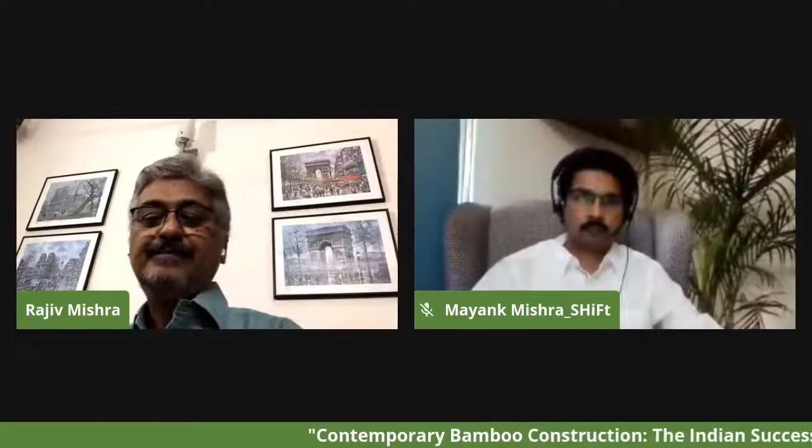Being an alumnus of the prestigious Sir J.J. College of Architecture, Mayank naturally adopted the role of principal architect with Shift, a boutique collaborative practice working mainly in the field of sustainable architecture. Being able to simultaneously lead the various processes at Shift, Mayank works with creative research and analytical thinking. He exhibits leadership as well as managerial skills while maintaining the core role as a doer. Known to be creative, naturally, since he is our student, he also exhibits great understanding and brings a high degree of concentration to his work. Sustainable campus design, green office buildings, master planning, and eco resorts are some of the well known real estate projects he has already worked on.

Water management systems, energy cycle, and life cycle are examples of Mayank's specialization. This will be followed by a talk from Dr. Abhay Gupta, a civil engineer since 1981, who did his ME in structures from SGSITS Indore, and PhD from University of Roorkee in 1996. His specialization area was aerodynamic interference in tall rectangular buildings and wind tunnel studies.

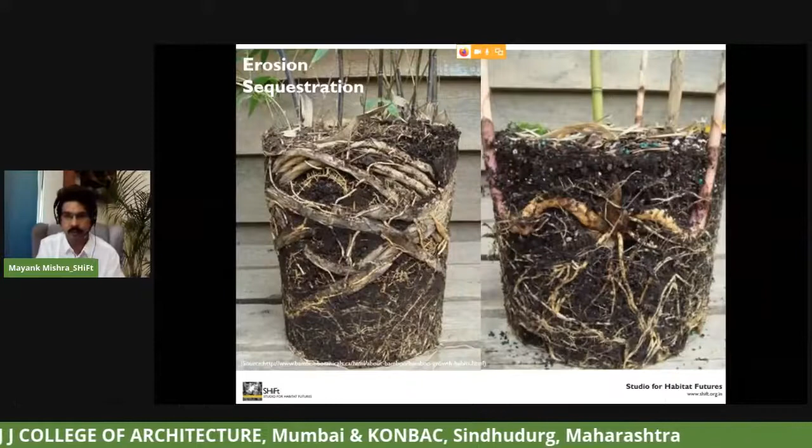But of course, it's a rapidly renewable grass. It grows in 3 to 4 years, ready to be used. It reduces soil erosion dramatically. It sequesters carbon dioxide, which means this is the only material that instead of producing carbon dioxide, it actually sequesters it. So if you're using bamboo, it will reduce your carbon footprint rather than add it to the environment. All of us know bamboo has been used as an element, as a member, in various handicrafts and other things.

But can bamboo be used as a structural element? Traditionally, yes, bamboo was used as a construction material. Most of our rural houses used to be made of bamboo, but it doesn't inspire most architects to use it as a modern material. It has been considered a poor man's timber, but now in today's world, it has taken over wood and can be considered a substitute for wood altogether.

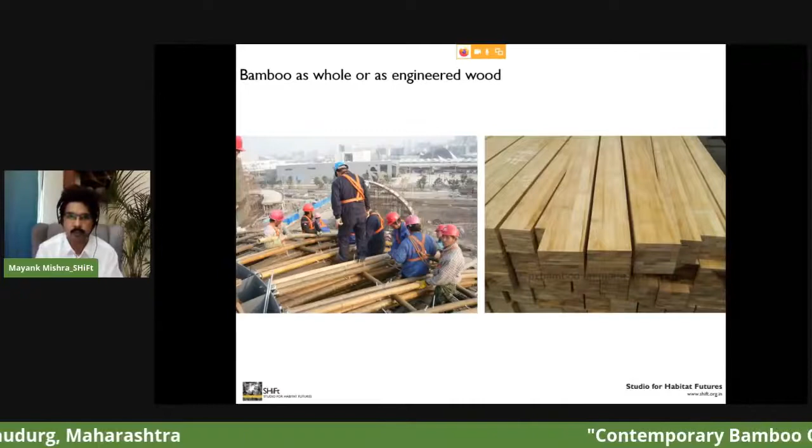Bamboo can be used as a whole element, or as engineered wood. There are various forms of bamboo that can be used. It can be used as board, in interiors, in structural members, for cladding and various other ways. So yes, bamboo can be used in construction technology in today's world.

Can bamboo be used in modern architectural practice? Can it be shaped like steel? We are very much aware of steel structures and the way they've been shaped today. All of us love it. As an architect, it really excites us a lot.

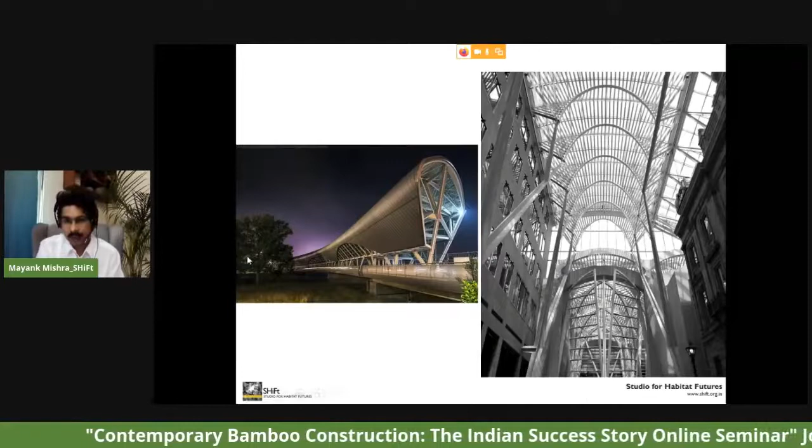But we need to understand that all of these structures are resource efficient structures, which means that steel, when designed, has been taken care that it behaves the way steel is supposed to behave. Similarly, concrete is designed in a way where it's supposed to behave. So can bamboo do the same thing?

Structurally, yes, because if you see the tensile strength of bamboo when you compare it per unit weight to steel, it is higher in tensile strength as compared to steel. The bamboo has a higher tensile strength.

It does have various other issues related to its compressive strength and other things, but that can be taken care of if we are able to design the structure in that way. This really opens up a new ambit of practice for structural consultants also, which means we need to design buildings in a different way. We need to get new codes in place. We need new methods to design these structures. And yes, it can take various shapes. Depending on the diameter of bamboo that we use, we can allow various kinds of shapes with the same material.

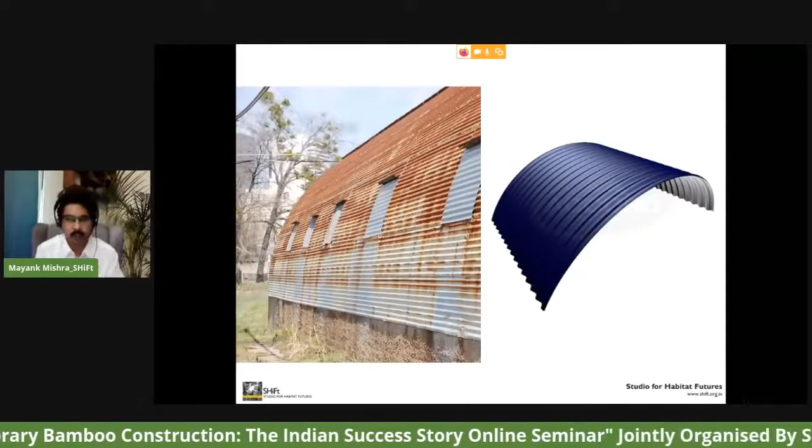Can we rely on bamboo like other industrial materials? Most of our industrial materials have their advantages and disadvantages. We have gone through it, we have prepared various kinds of solutions for it. Like for steel, we have various kinds of coatings that can take care of it. So we know the pros and cons of that material. Similarly, for bamboo, we do know that there are borers and termites that can create an issue for bamboo.

The weathering can be one of the issues, but all of these can be taken care of by having various kinds of treatments, having design which can make sure that it is not directly exposed to those kind of weather conditions. So yes, bamboo can be used as a material in today's world.

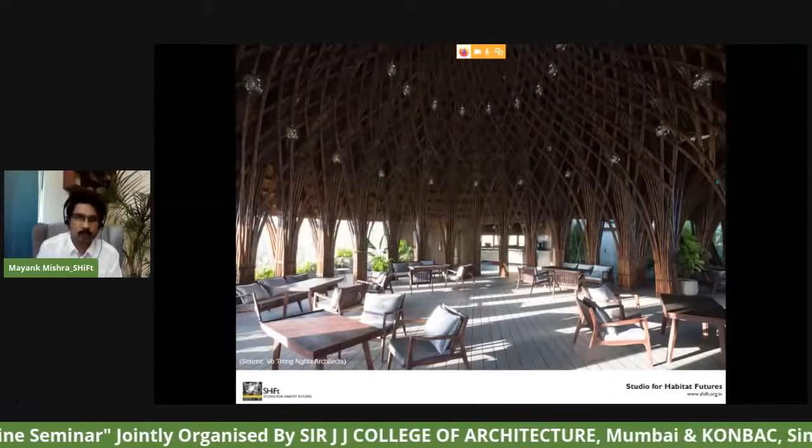What are the global examples that we have? Famous architect Vo Trong Nghia from Vietnam uses bamboo very often, and the structures really look very great. You see the diameter of bamboo and the kind of design that you see over here. Similarly, Simon Velez, who's also one of the inspiring architects, also uses bamboo. The difference that you see in both of these structures is actually the difference of the diameter of bamboo, which defines the way the structure has been designed.

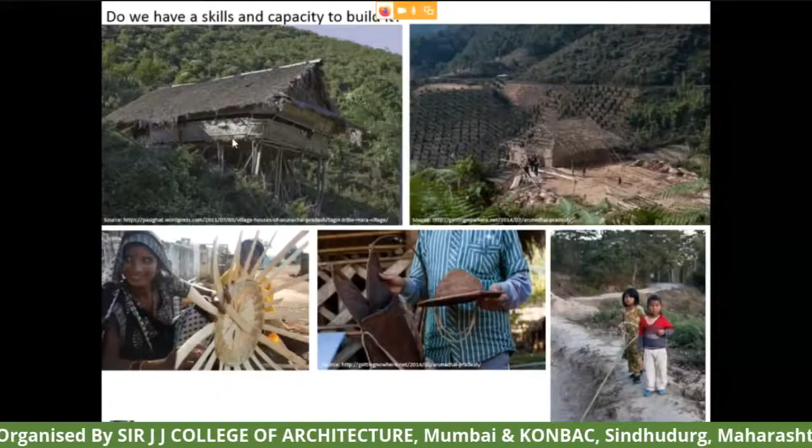The first question that comes up is, do we have skills? Do we have capacity to build something in bamboo? The leftmost picture on the top left hand corner that you see is of a hut being made completely in bamboo. This is a rural house in Arunachal Pradesh. It is on a cliff at the edge of a hill, almost hanging like falling waters, with a natural material. On the right hand side, you see a house being made in bamboo. So yes, certainly we have skills to build in bamboo.

Now, it's not only skills that we have to build in bamboo, we also have craftsmanship that can be used with the material like bamboo. So culturally, we had these skills. We were able to use these materials as building material and also as crafts.

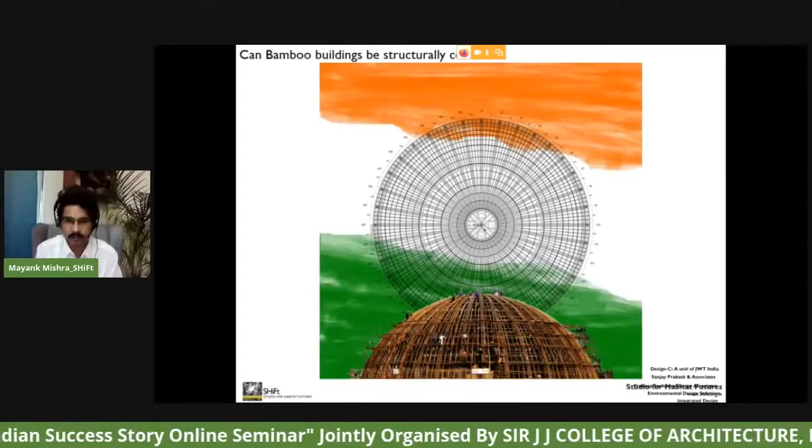So this is possible to do. It is possible to use structures, structural elements that can be certified by structural consultants. Of course, there is lots of work that has to be done in codes, but certainly in today's world, we can start working with structural engineers who can certify these buildings for certain kind of things.

This is a picture at the day of inauguration. You can see lots of people lined up wanting to enter this project. So I think we got the maximum footfall on day one to see the bamboo dome.

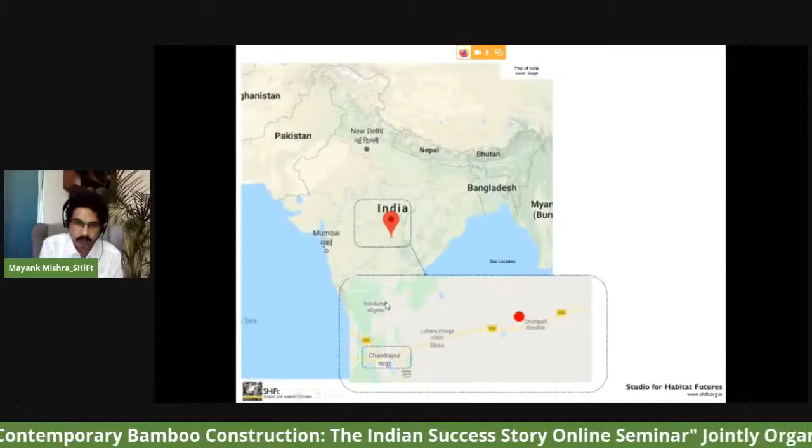Now coming to the story of BRTC. Having the experience of all of this, having global exposure, there was an initiative of the Government of Maharashtra and Tata Trust, something about which our earlier panelists have already spoken. The main concern was to create a project in Chichpalli, very close to Chandrapur, and as correctly said by Mr. Ramarao sir, it has lots of bamboo going over there. It also has Tadoba National Park, which has lots of tigers in those areas.

One of the stakeholders of this project are the tribals of this area, whose main livelihood depends on forest and the buffer zone of forest, where they actually collect biomass and sell it outside, which does create a conflict with the wildlife. If they are entering into the wildlife areas to collect this biomass, that would create a conflict for the wildlife and for the humans. On the other hand, this is not a fixed source of income, which is not a reliable livelihood opportunity. And as tribals who always had entrepreneurial skills, this is not something that we would want them to do.

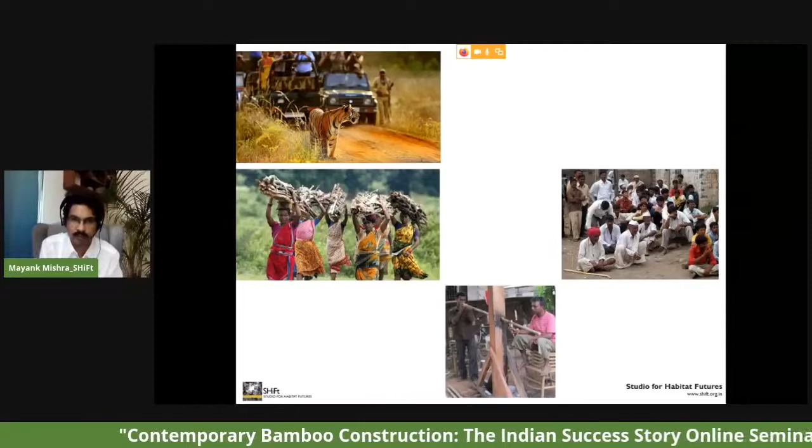India has a huge population aged between 25 to 50, which wants to have various kinds of skills to earn their livelihoods, to have employment in various sectors. And of course, there is a possibility of bamboo being introduced in this area where the skills can be developed. There are lots of farmers who are in distress today because of the crops, because of the rains. Sometimes they have no rain, sometimes they have too much rain. All of this creates an issue for a farmer. So growing bamboo can also help them because it's a sturdy crop.

It can actually withstand these weather conditions, and would assist farmers to have an additional source of income. Bamboo can be linked to them, and products made from these elements can be sold in the market easily. All of this, when sold in an urban scenario, the money generated goes directly into the hands of the people who need this kind of livelihood, which ends up promoting bamboo as a sustainable material, promoting bamboo farming, and also reduces wildlife conflict.

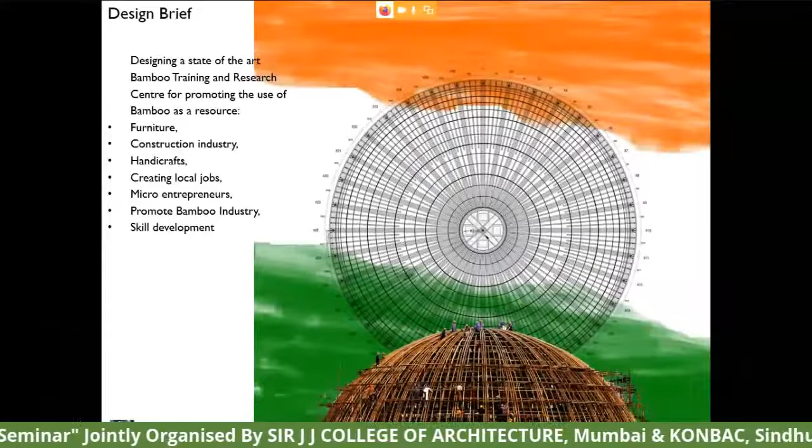So the design brief we had was to create a state-of-the-art center which would promote various technologies, where people would be able to do research and make various kinds of furniture, work in the construction industry, and handicrafts. This would help create local jobs, make many micro entrepreneurs, and promote bamboo industries.

These were the various courses that would be offered in this institute, including courses for awareness and Skill India, meaning engineers and architects need to come to this institute, work with these artisans, and create various designs, whether furniture or building industry. This institute will provide a platform for architects, engineers, and artisans to work together to create something in bamboo.

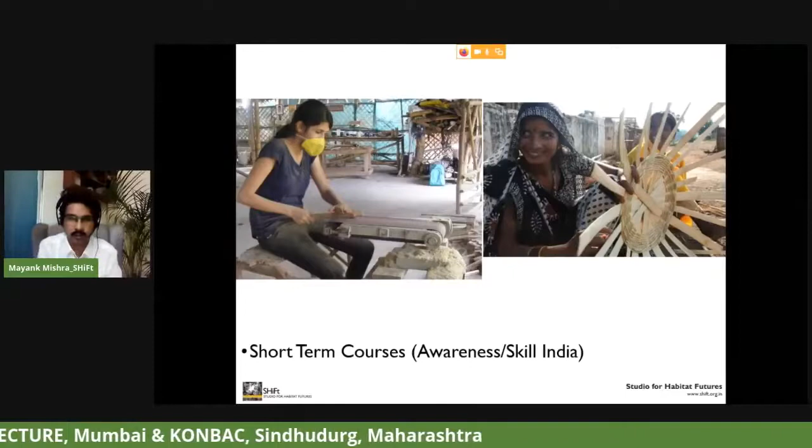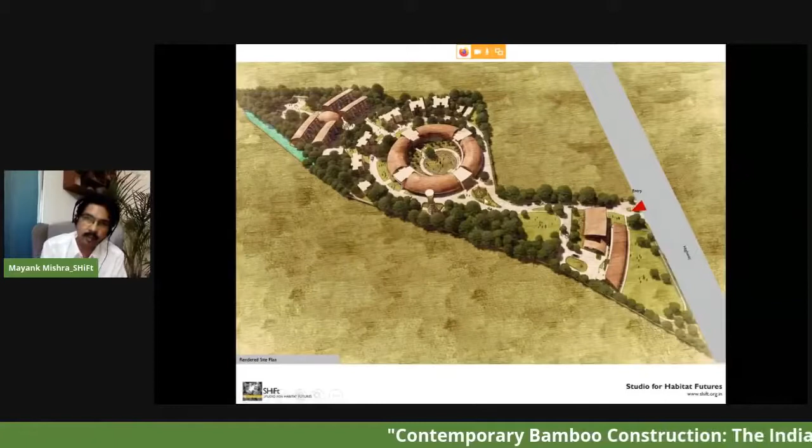This is the administration block. Lots of people would visit this area, see the products being made, which would get exhibited in this exhibition zone. The central block is the academic and workshop area. Behind that is the residential area, then the hostel blocks, and then the STP and other parts. I'll quickly go through these slides.

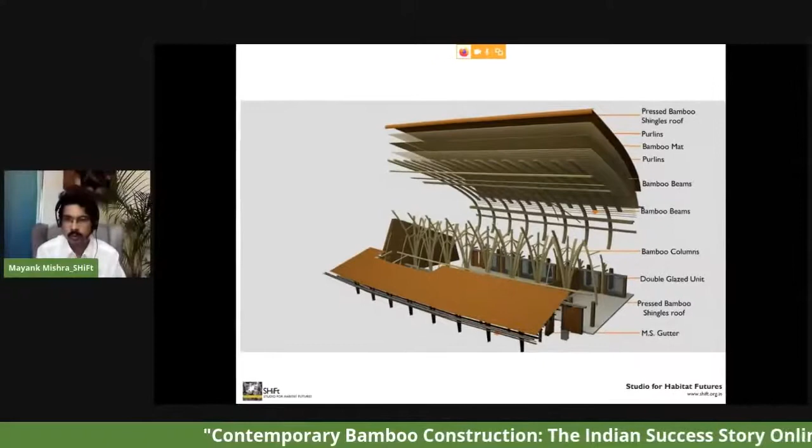The idea was that after ground level, we should use bamboo as the structural element, so bamboo was used in every form—columns, beams, purlins, bamboo mat, and so on. For infill, instead of using bamboo, we felt we could use another material, rammed earth, which helps reduce the temperature difference from outside to inside and also gives a very good look to the whole project. So the other material added was rammed earth walls.

A business-as-usual approach—what would have happened if we'd gone with that? It would mean architects and engineers design something that goes for a mock-up, where the technologists and craftsmen—construction managers, PMCs, bamboo and rammed earth experts, and craftsmen executing it—make a mock-up and give their inputs. It would get redesigned, with architects defining what needs to be done, taking the front seat while everyone else takes the back seat, and then everything gets executed.

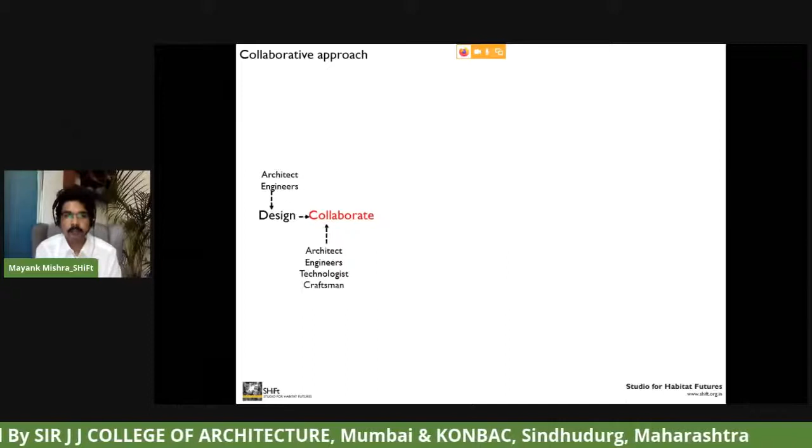But here, it would not have been successful without a collaborative approach, meaning the design would be developed and then collaborated on with all of them. The designs made were sent to all these people and discussed well in advance before releasing those drawings for mock-up. Then the mock-ups were created.

Again, after the mockups, there was a collaborative effort to see how the members and elements are behaving. We would go back to the design board, redesign it, finish the whole process and send it to the technologists, craftsmen, and everyone else in the team. Only after that would it go for execution.

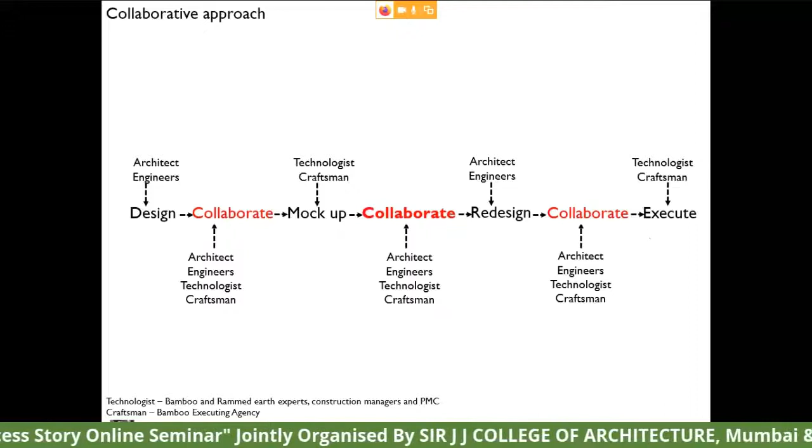This does mean that initial time was taken up for collaborative effort, but at the end of the whole process it really saved a lot of time for all of us because we didn't have to re-innovate everything. So a collaborative approach really helped us a lot, and in all of these approaches we got huge support from the government of Maharashtra, all their departments, and particularly the clients, who always supported us and allowed us to do various kinds of changes which was not easily acceptable in a business-as-usual approach.

We would end up saying, this beam has a problem, we need to change it, and that would be just after the mock-up. We would change it, redesign it, reissue the drawings, and redo it. So this was something required for a project of this type.

We got huge support from Studio Auroville, who helped us create these rammed walls and helped us do the transfer of technology over there. So now we have people in Chandrapur who can build rammed walls.

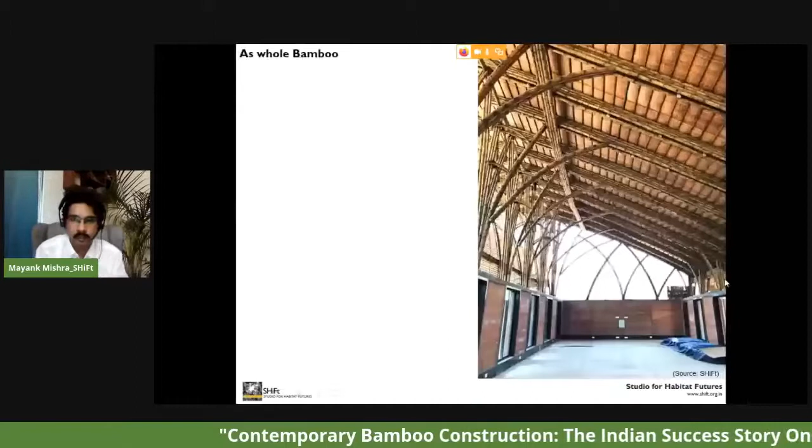There were various other things done. The configuration of the buildings was done such that the first project, the experimental block, used bamboo as a whole. All elements were assembled on site and then executed on site. This was the first one where the bamboo used was of 100 dia, and you see the difference in how the spans are taken care of.

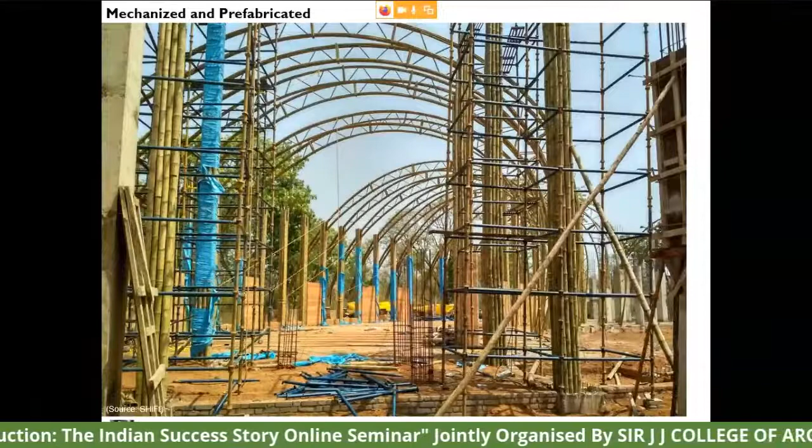The other approach we took was to mechanize and prefabricate most of these elements. All of these elements you see were prefabricated in a factory and then brought to site and assembled — the columns were assembled, the trusses on top were assembled. All of these were prefabricated. It reduced time consumption on site, helped us manage quality, and gave confidence on site for the people getting it executed.

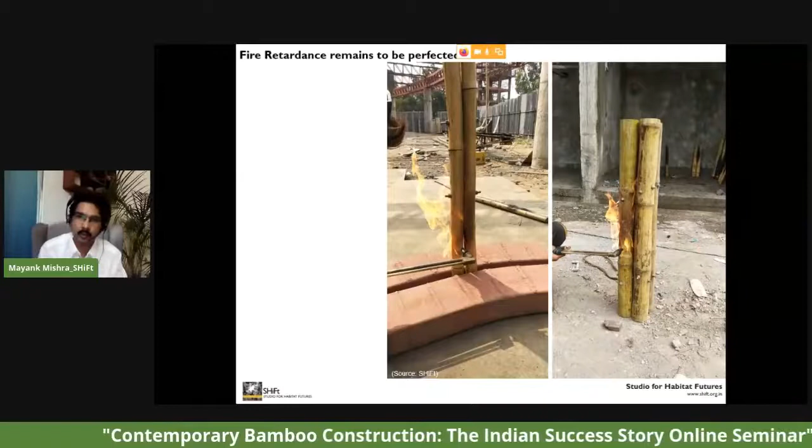What are the areas of research now when it comes to bamboo? Fire retardance remains a concern. We designed these buildings so people can evacuate the structures in 45 minutes. There are a few areas where RCC staircases were added so evacuation becomes easy, and it also takes care of the national building code.

There are various coatings available, used in wood structures, that can be applied to bamboo. This is an area we are working on, and I think we have been able to successfully demonstrate an increase in fire retardance of this element to 2 hours. Naturally, bamboo has fire retardant properties because of its outer shell, which retards a lot of fire. After that, if fire goes inside, that is where collapse starts happening.

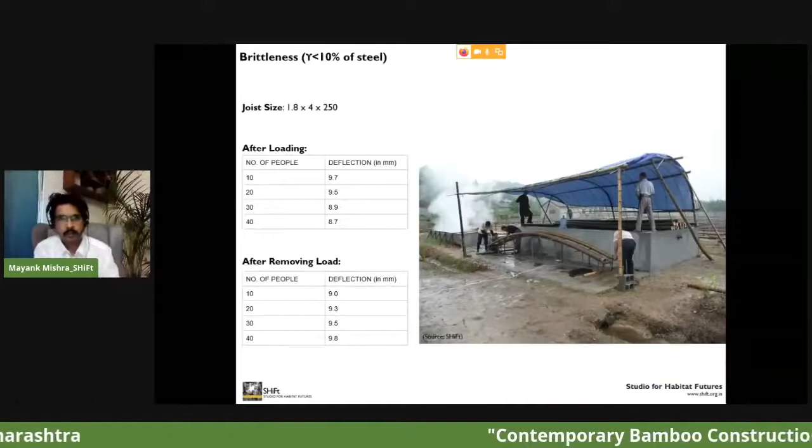You need codifications for the control of cracks, since bamboo is a linear fiber material that grows naturally in a linear way. There is a brittleness in this element, meaning there would be some deflection after the building is designed, so you need to design for that deflection. There is also variability in the material — various diameters — which is not easily accepted by structural consultants. They would say, please define 50 or 75, while you would end up getting 60 or 85 kind of dia, and the dia would also vary at the start and end of the material. So this variability of natural material needs to be taken care of.

There is a huge research area in joints that can be taken up, which can be the next area where the codes and all of these things can start defining it.

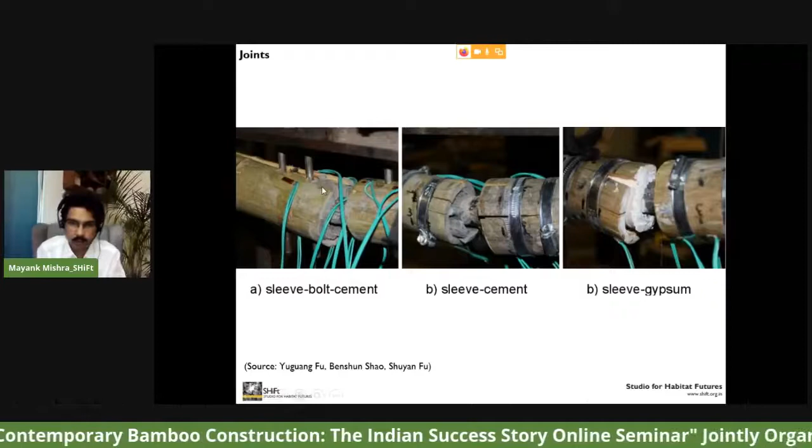This photograph that you see over here is actually a load testing for deflection at a lower level, where our structural consultants and our proof consultant are standing and checking what kind of deflection you're getting with this bamboo beam. And you see all of them collaborating together.

So you have our site person from KONBAC standing there trying to see what is happening. You have the structural consultant, people from PWD checking what is happening, and Dr. Abhay Gupta checking if the beam is behaving in the same manner or not. So it's a collaborative effort, and that is something which would be very much important.

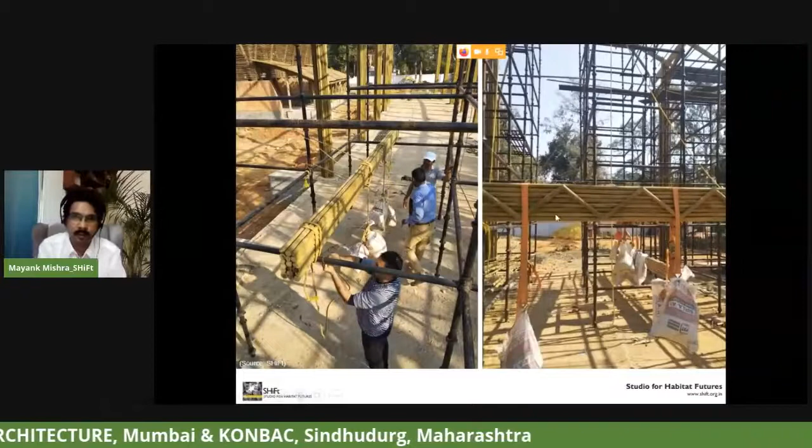These are some more tests which were done before hanging these beams and checking the deflections. There were some additions to these structural elements on site before they were added to the whole member. Of course, we also did lots of tests on our own in the factory itself to check various kinds of deflections that can be seen.

I will quickly jump to the site pictures now. These are some of the pictures. This building that you see was done in 100 dia bamboo.

After that, we recognized that we should promote the bamboo of Maharashtra, and after that we have used all bamboo being grown in Maharashtra. Particularly, we couldn't use bamboo grown in Chandrapur because it was not of that category that could be used for structural elements right away. There are lots of variations in nodes and differences in those things, but we feel in future that could easily be taken care of if we start promoting the growth of bamboo in a particular way. After this building, all the buildings were made in 50 dia bamboo sourced from Maharashtra itself.

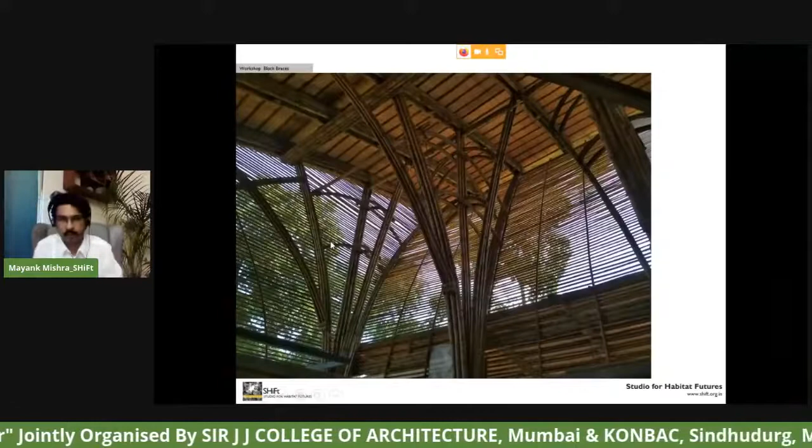This was the first building in 100 dia bamboo. There you see various kinds of shapes and forms being taken. All of these elements are structural elements, and all of these were done with structural consultants and various other participants like our site people and all of them, including KONBAC, including inputs from the PWD department or forest departments.

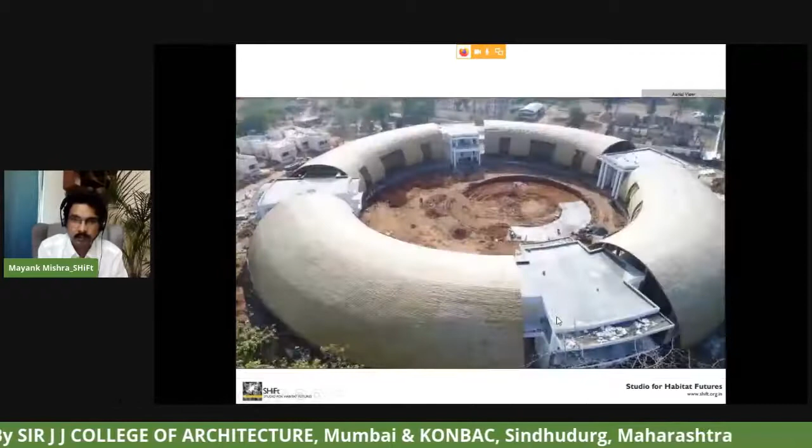Some more pictures. These are large spans, about 15 meters in one direction. Some more pictures.

In this project, we have used approximately 43,000 running meters of bamboo, which would have benefited about 54 acres of bamboo farming, which does mean that there is a positive footprint that this project has given. It does mean that there's a lot of carbon being sequestered by using bamboo instead of concrete. It has generated about 420,000 man days in bamboo construction itself. It means that you are giving jobs to green technologies, and that is a way forward for all of us to look at. Thank you.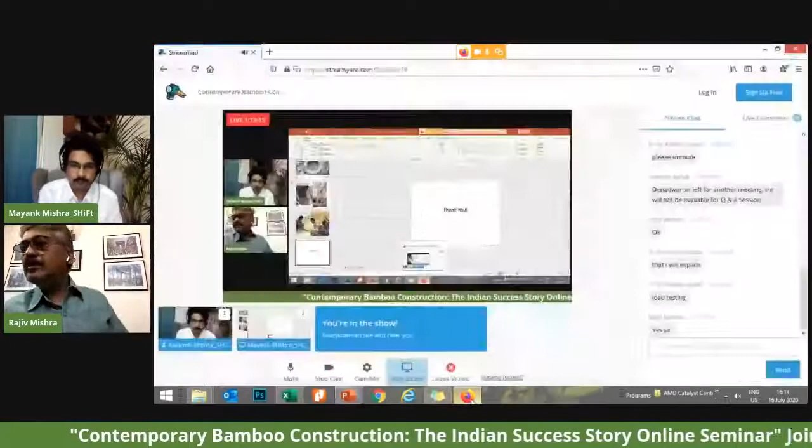Thank you, Mayank. I think that was a wonderful presentation. Totally mind blowing. It was so engaging, and every detail after detail that you were presenting.

I think with your explanation, we understood how the form using bamboo is affected, the shape of the structure is affected, and therefore now I think it would be very interesting to listen to our engineer, Sri Gupta, who actually was working with you and helped you decide the final form that the structure took because of the bamboo, the large spans that you could modify based on the behavior of bamboo as a structural material. This would basically now be understood by our structural engineer who was involved in this project. Dr. Gupta, as you know, is from Roorkee and also an academician for 23 years. And therefore, I'm sure he will put it the right way.

But many of the questions that we had to answer were how will you take care of the fear factor in bamboo? How would you take care of the structural strength of bamboo when the weather changes? And how will bamboo then be a safe material to work with? So I invite Dr. Abhay Gupta, please, to reinforce the presentation of Studio for Habitat Futures presented by Mayank, with your small talk on structural analysis of the design presented by him. Welcome, Dr. Gupta.

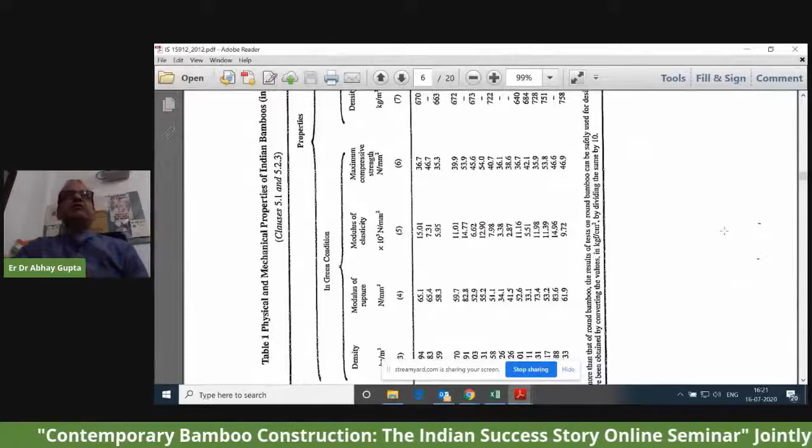The main challenge was what is available in the country, which variety and which is going to be used. So initial inputs from Studio Shift were that we are going to use 100 dia bamboo of a particular variety, Balcooa. We looked for the variety, the properties of that bamboo, and when we say bamboo, certainly the thing that comes to mind is it's a round hollow pipe, a round hollow tube. Even the code IS 15912 very clearly mentions that we have to consider them to be hollow steel tubes only. So that was one guideline for us.

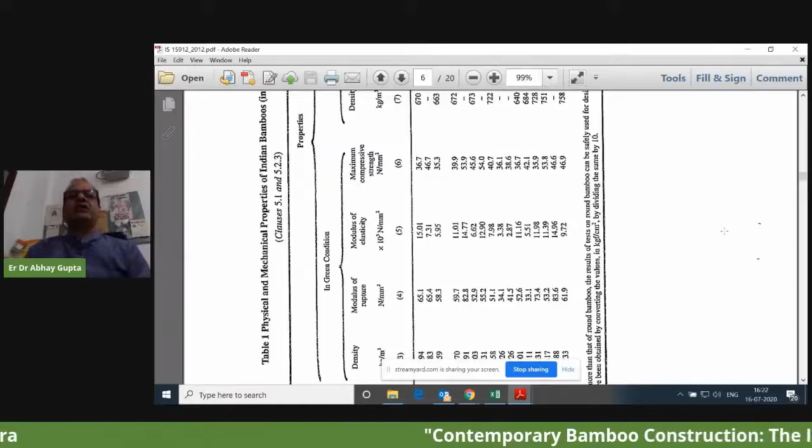Then the next challenge was how many of such tubes to be combined together to form a particular component. The main contribution that our team did was to devise various configurations as suggested by Studio Shift in columns, in beams, in various flaring elements - how many bamboos we need to give a particular shape and size. For each combination, we worked out the geometric properties. Suppose in a particular element we need some 20 bamboos of 100 dia - then how are those 20 placed? Are they arranged in a rectangle or some plus shape or what? So for each of these shapes, we prepared a table of their modulus, moment of inertia, section modulus, and their effective area. Then we modeled the entire structure in a standard software.

We all know, all structural engineers know STAAD software. In STAAD, we considered the elements to be steel tubes, but rather than the properties of steel, we used user-defined properties. There we gave the input of the bamboo properties from this code, where it is clearly indicated what the permissible stresses to be used are, along with the factor of safety.

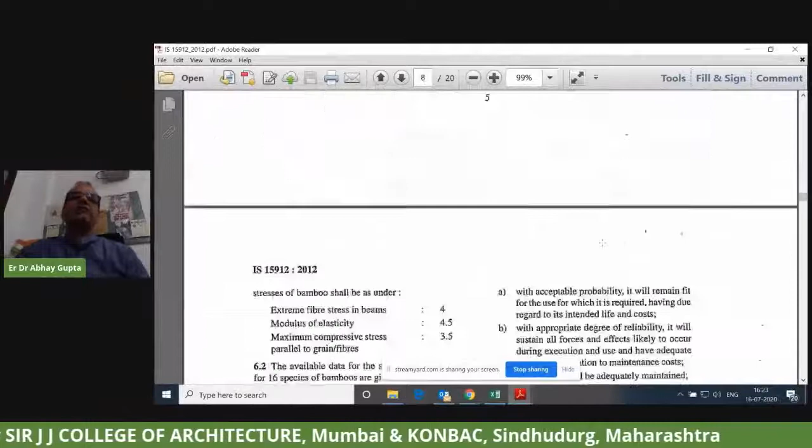This is one very important aspect for designing structures with bamboo: the factor of safety values recommended are like 4, 4.5, 3.5, meaning a very high value of factor of safety is recommended. Now there are reasons for that. Why such a high factor of safety?

Mayank has already explained that we need to understand the bamboo which is grown. It is a natural material, not a factory made product, but even then we are using the prefabricated or pre-assembled technology. The variation in properties and characteristics of the bamboo, like the diameter, varies. When I say 100 bamboo, it is not 100 throughout. It may be 100 at one end and 80 at the other end.

If I take the longer one, the first photograph which Mayank showed of the growth of the bamboos, you could observe that they are very thick at the base, while going to the top they were thinning. This means we cannot use a very long length of each bamboo, so the restricted length was about 4.5 meters which could be used. This means there will be several joints in the bamboo by itself, so that was one of the challenges.

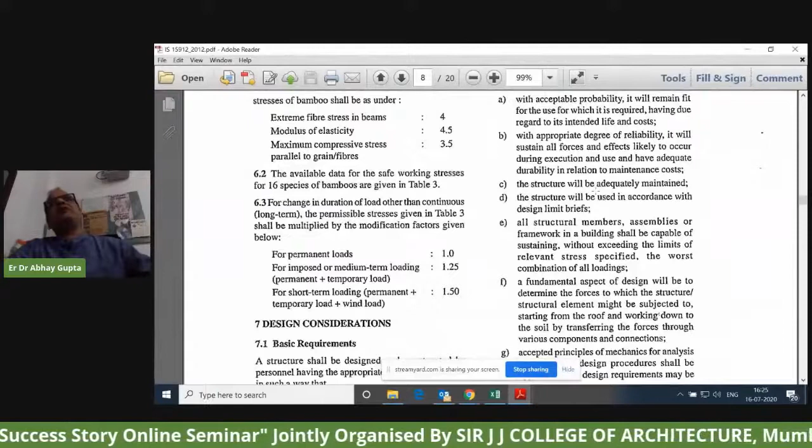Another challenge was the wall thickness. In general we were told that 10mm thickness is there, but that 10 is also not a constant thing, it was varying. So when we did the first design, we considered everything to be 100 and 10, and we produced a design, meaning the number of bamboos required in columns, various elements, beams, and all that.

Then through the mock-up test, we loaded the structure as a mock-up and observed how much deflection the beam element is actually having, and we compared that with our STAAD analysis. We observed that there are deviations. Whatever we are seeing in the STAAD model is not exactly what we are getting on site, we are getting larger deflections. Now what is the reason?

The reason is very simple. I am assuming that there are 10, 20, 40 bamboos combined together, and those bamboos are behaving like one single element. But no, it is not like this. The bamboos need to be connected together, and that is where the experience is required.

And that is where two people helped us a lot. One, Mr. Himanshu Tulpule ji, an experienced structural engineer working with bamboo since long. And another one, KONBAC, and Mr. Kunal Negandhi with his team, along with Mr. Uday, their engineer. They helped us a lot in working on efficient jointing.

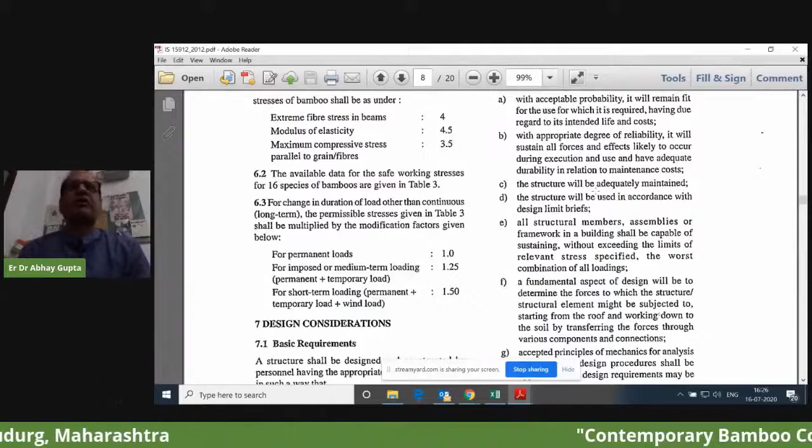I would also like to inform everyone that the entire structural design has been proof-checked by Professor Prem Krishna, a former professor of IIT Roorkee, an expert on wind engineering and steel structures. He guided us on achieving the targets on serviceability. So as a structural engineer, strength and serviceability were the two points which were very, very important.

We achieved the strength by combining several bamboos, but on the serviceability side, the deflection was giving us a challenge. I have no hesitation in accepting the actual deflection in the structure, because this was the first project of this nature, where we have used long beams, big arches. We have used an 11 meter span truss, which is really a big size. So all these were being used for the first time.

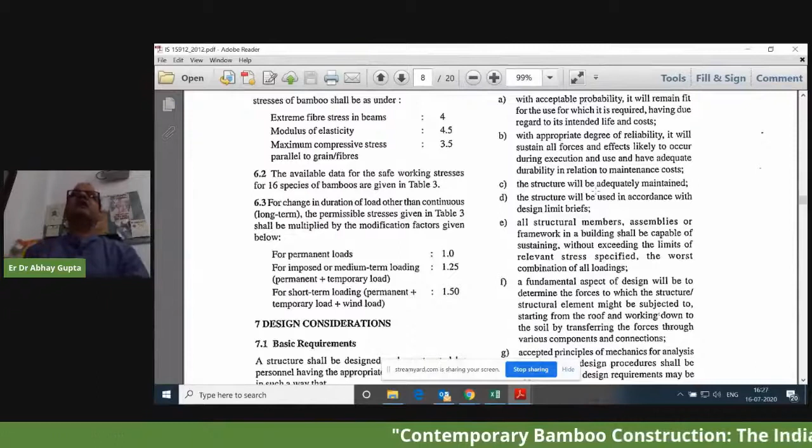So the deflections of the members after the complete erection were significant, they were visible. We are habitual of seeing RCC and steel structures where deflections are in millimeters, and as compared to their span and sizes, we are not able to visualize them. But here we were able to visualize them, and the site team was very efficient in giving us regular feedback. Based on their feedback, we were altering the design of the elements, adding some bracings, and converting the nature of the members.

So with all that, we were able to produce an excellent combination of these three big structures: one workshop building, one admin building, and one academic block which is a 360-degree complete round structure. But there are two more structures in the background of the site plan which Mayank has shown. There are two hostels, which are RCC buildings, but for the top cover, the roof, we have used bamboo arches to cover them.

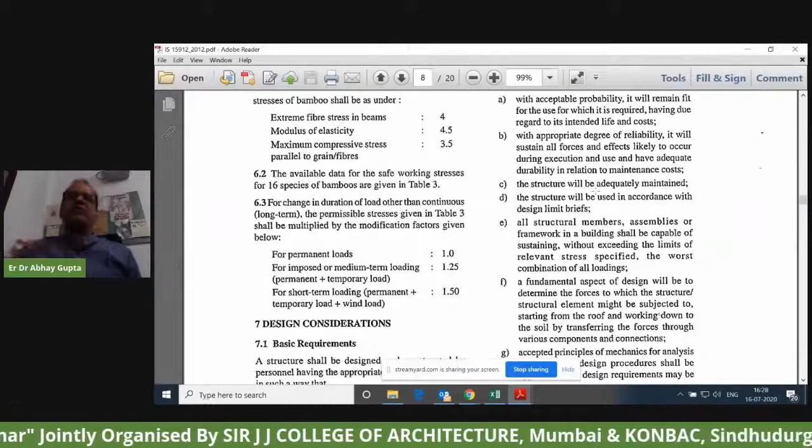That looks beautiful, fantastic. So here I would like to inform all the young engineers, architects, and others listening to me that it is a completely prefabricated kind of construction where all the elements can be fabricated in a factory, because treatment is required and jointing is required. So you can make them in a factory, bring them to the site, and assemble them very efficiently. This is a very good concept which steel structures are using, but we can very well import that, or transport that, to bamboo structures.

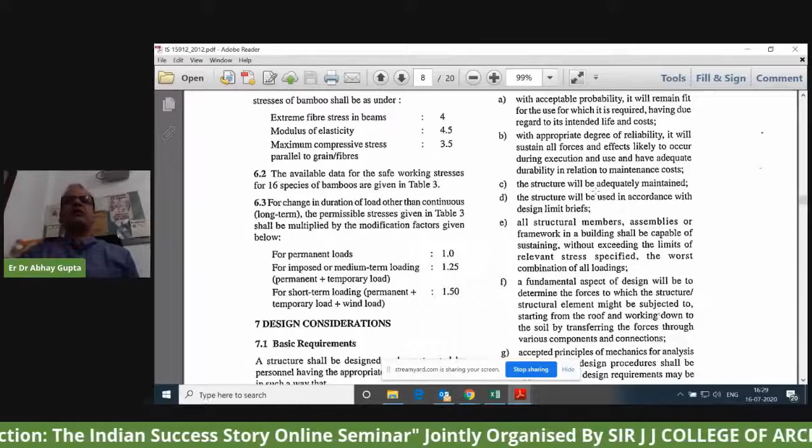One photograph which Mayank has shown where 30 people are standing on the floor. There was a query raised from the PWD department that whatever you have designed is very good on the software and in theory, but we would like to actually see, because when people walk on the floor, there are some vibrations. So we want to be sure how it will behave when the load comes.

So we made an actual live load test of the prototype, and those 30 people together weighed 2000 kilograms. That 2000 kilograms divided by 300 kg per meter square over an area of 6 meter square, we made them stand in stages and recorded the deflection, then unloaded and recorded the recovery. To the happiness of each one of us, the recovery was excellent, almost 99% recovery of the elastic deflection.

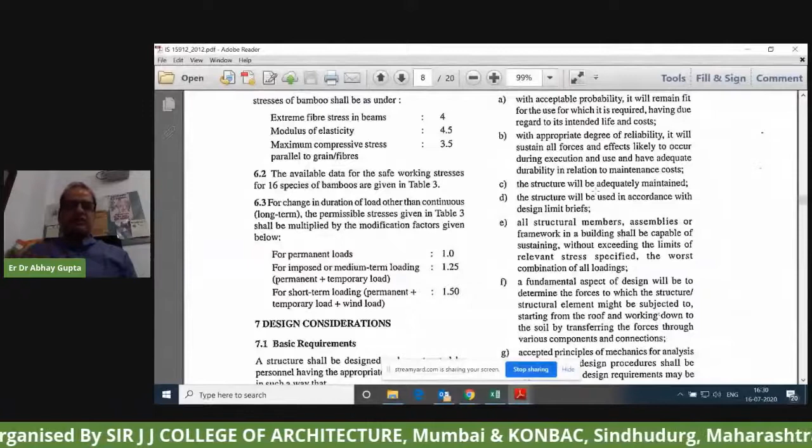So that gave confidence to us and to the PWD department that this structure has been well designed and constructed, and the joints are also working properly. Now, on the joint side, this code also provides some guidelines on the joints, and those who are interested can further read this. There are some very good illustrations, and you can see that there are some strips which are used.

From architect studio Shift, we had a limitation initially that we should not use any strapping over the bamboo bunches because that doesn't look good in their aesthetic sense. So we made all the connections with fish plates, MS plates inserted between the bamboo, and then used bolting. So all the connections are bolted connections, meaning you can't even see from a little distance that there are bolts and connections. So the beautiful structure has come up.

One architect who visited the site, because many people come and see it and it is being published, came and was so happy, Rajivji, his first comment was that it's a musical feast to walk in the corridor of this bamboo structure. It really looks very elegant.

Friends, this is about this particular project, but those of you who are interested, there is a lot of very good material besides this IS code which is available. And as Ramarao sir and Chief Engineer sir have said, whatever information we have, if any of you is interested in working with bamboo structures, then a lot of information and support we can share. Some of the pictures have already been shown by Mayank.

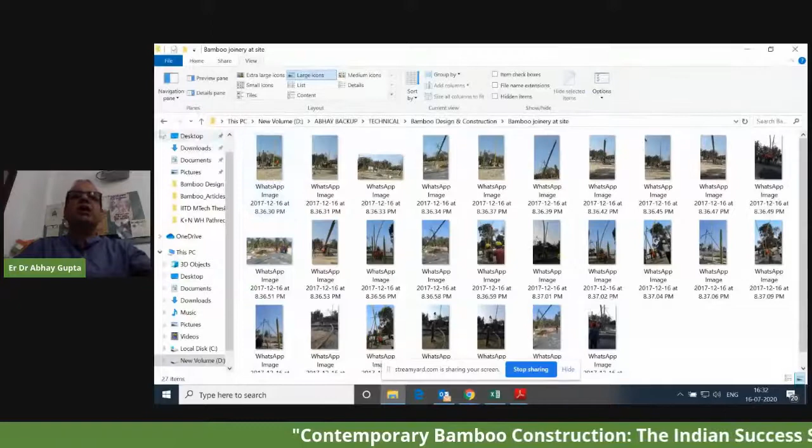As of now, from my side, this much I would like to convey as far as the structural engineering is concerned. When we enter the question and answer session, I'll be responding to your structural queries.

Thank you, sir, thank you very much. I think it's quite clear about the elasticity modulus and the ratio with which the bamboo bends with respect to tension. It was quite interesting to know about all the loading tests and everything you were able to carry out, and this prefabricated material, putting it together, was quite interesting.

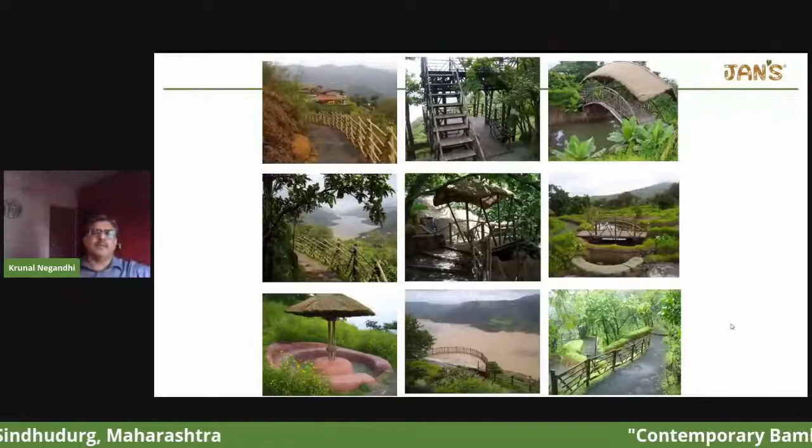And the more I, as a civil engineer, got in touch with the material, the more I used to feel, why don't we see this everywhere? This is a fantastic material. The aura of the material is fantastic. The tensile strength is good. You can build multiple things. Why are we not seeing it?

My background being sustainability, I've been chief sustainability officer for a very long time, and I've been part of IGBC, LEED, and Griha - I used to look at green buildings, green clusters. What I realized is that although we talk about operational energy reduction when buildings go green, the biggest issue is the embodied carbon itself. Architecture 2030 has indicated that by 2030, 74% of the entire carbon sequestration or GHG emissions issue will come from the construction sector.

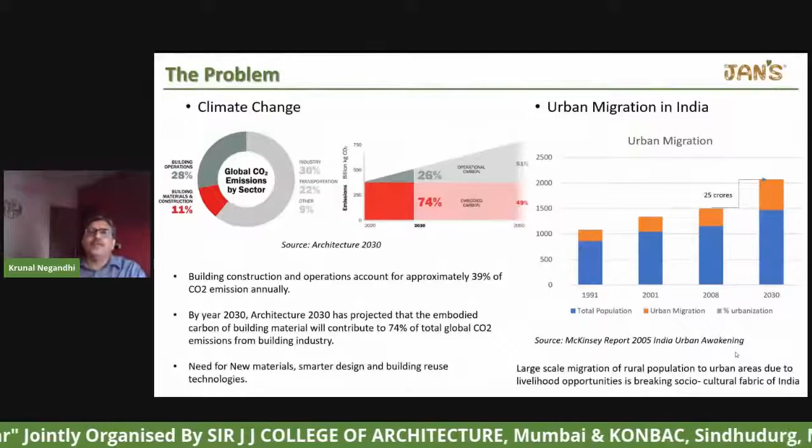And what options do we have for embodied carbon? We hardly go beyond concrete and steel as a material. So it was very intriguing to my mind - why are we not doing anything as engineers? Why, when we do something, does it always have to be a negative impact, and why can't we look at negating that impact? With that in mind, we started understanding more about bamboo.

Mr. Mayank has already shared a few characteristics, I'll just touch upon it a little more. The most interesting thing about bamboo is that if you don't treat it, it will anyway start to decompose from the 6th year onwards. So although it's one of the fastest renewable materials, there's no point in not cutting it. If you cut and treat it, it will last 100 years. So what you effectively have is a God-given natural material which can store carbon dioxide in its body for the next 100 years, and not release that into the atmosphere.

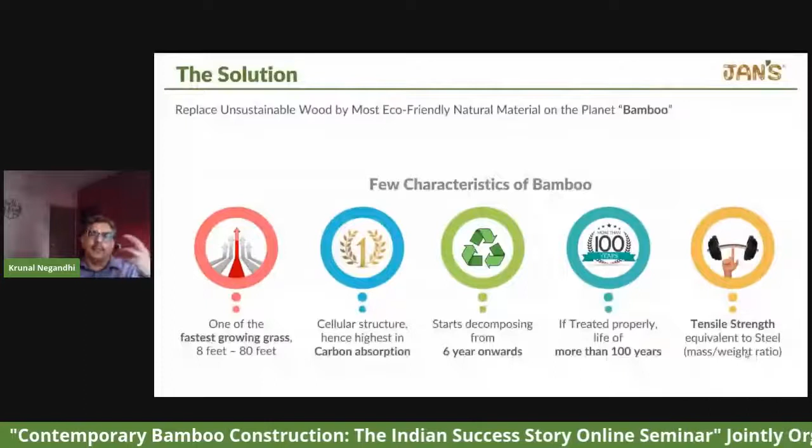That, to me, was the point when I decided to move out from conventional work and completely dedicate my time and energy into building bamboo as a mainstream construction material.

As a corporate person, I've worked 21 years with large multinationals and have a habit of benchmarking. So I started looking at what is happening in the country. Even when we talk of bamboo fencing in the country, this is the kind of pictures that come to your mind, vis-a-vis what you see in other countries.

Simple structures like fencing, furniture, or bridges - these are the bridges done internationally. You see this bridge, these are called bamboo gazebos in the country, vis-a-vis gazebos done outside. As I started knowing more about it, I realized there's some big problem in the country.

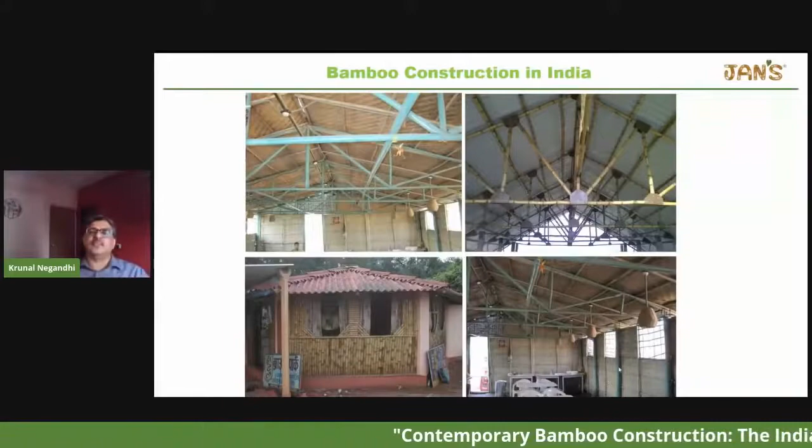What I realized initially was the problem is that one doesn't handle the entire ecosystem. Unlike when you want to do a concrete structure, you don't go and mine to make cement - you get cement from the factory. You don't go and mine steel ore to make steel rods - you get steel rods in the market. What you do is just construct. But that doesn't happen with bamboo. There is no established ecosystem in the country.

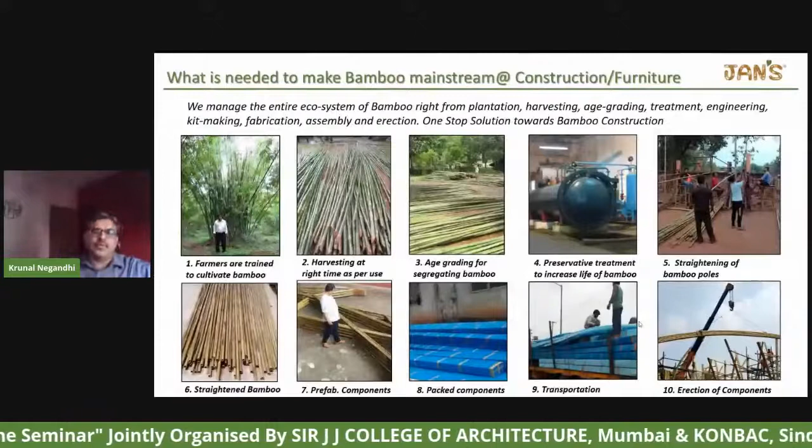This being a natural material with tapering, different diameters, thickness, and strength characteristics, one needs to handle the entire ecosystem. You can't leave it to chance, and you can't leave it on someone else. So right from getting the right material, where we worked with KONBAC for a very long time, sourcing of material, the treatment, the prefabrication, the straightening, the engineering - you've got to manage the entire thing. It's a lot of effort, but one has to do it, otherwise there's no possibility.

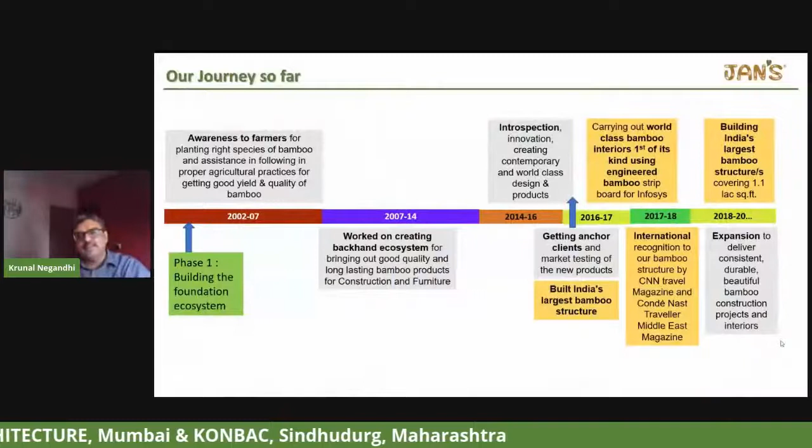KONBAC started its work in 2002, and Jan's was established in 2016. There's been a whole journey of learning, knowledge, time, energy, and money spent to bring bamboo to where it is today. And this is just a tipping point - the beginning of a very, very long journey.

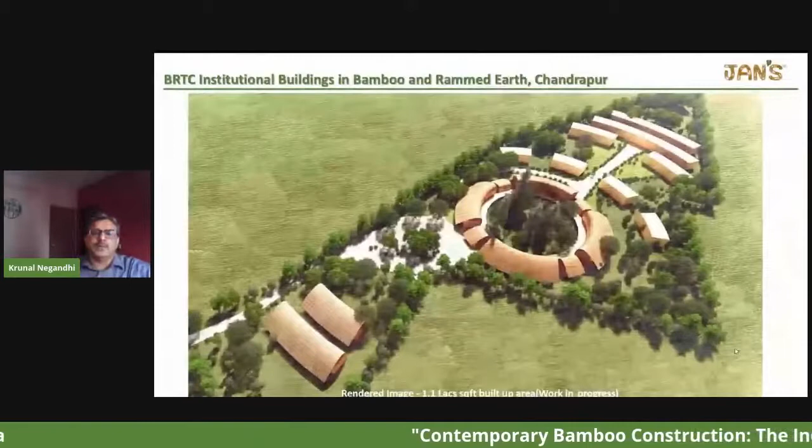Coming to the BRTC project, many of these images in some form or another Mr. Mayank has already shared, so I won't go into detail, but I'd like to share my experience as a contractor, as an agency that actually built this entire structure.

Mr. Ramarao always used to say that we can all talk, but ultimately the onus is on the contractor, because if they don't build it, everything else goes down the drain. So for this first structure, which Mayank shared, we decided like any other construction that we'd bring the bamboo, treat it, and do it at site. We realized that was just not possible.

You need to bend this bamboo. So when one team would bend bamboo, I'd ask at the end of the day how many poles had been bent, and they'd say just 2 poles. I'd scratch my head thinking - 4 people bending one bamboo, and it takes 4 hours for one pole to be bent. How the hell am I going to complete this project?

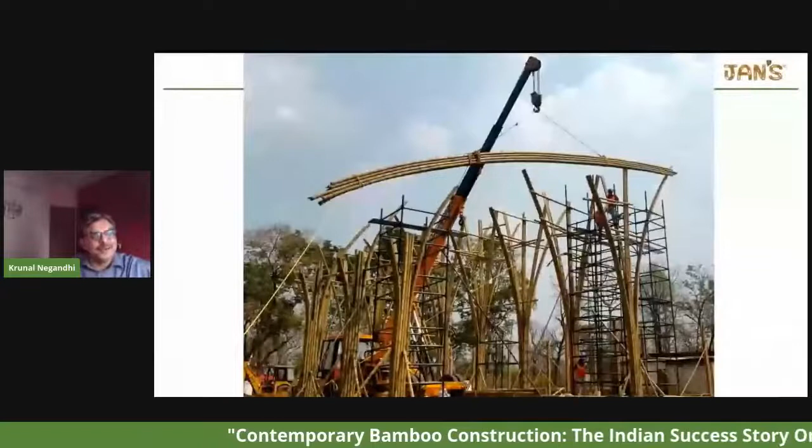We required 226,000 running meters of 40mm diameter bamboo and 68,000 running meters of 100mm diameter. How was that going to be possible? And where was that level of skill available, the kind that could be replicated at scale?

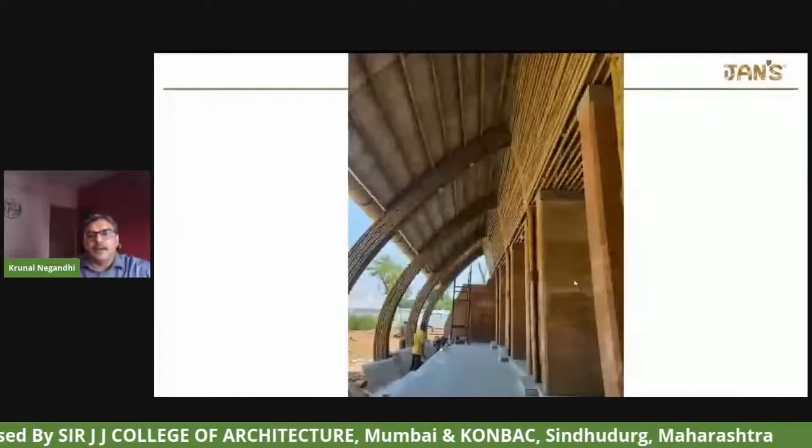Although we did this first structure at site and found we could achieve the quality, it took unexpectedly more time. But everyone had the mindset that this was the first trial structure, and all the learnings could now be used to expedite the rest of the 8 structures we were supposed to build. With that mindset, the consistency we achieved in the first structure became an input for building the next ones.

The next structure was the admin block, and here we said let's start pre-engineering and prefabricating it. We started it like a car assembly line - in a crude form, we set up assembly lines in the factory. Sanjeev and KONBAC worked together, and Sanjeev will share much more about the work done in the factory, so I'll just touch upon it.

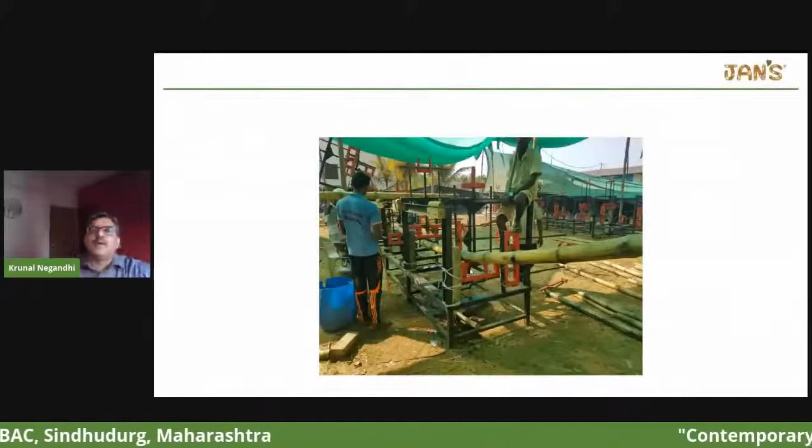We invested in creating differently designed machinery to bend the bamboo faster and to press the right amount of load, etc. Some of it was successful - out of 10 experiments, 2 were successful, 8 were not. But slowly we could gather speed.

At one point we had a peak of about 750 to 800 people working at the factory site altogether, churning out large amounts of prefabricated structures that could actually be transported. Although it became a big cost burden to us, since as an agency we hadn't anticipated prefabricating everything in the factory and transporting it by trailers and the like.

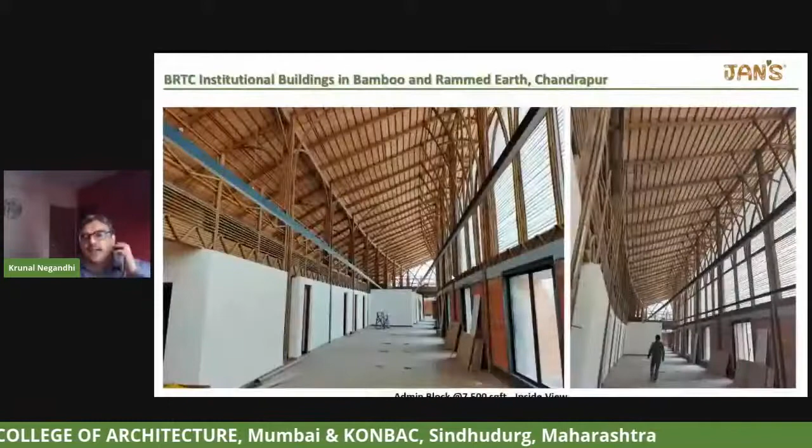We tried to ensure that 70 to 80% of the job was done at the factory, and only 20% of the job should remain at site. With that in mind, this is very interesting.

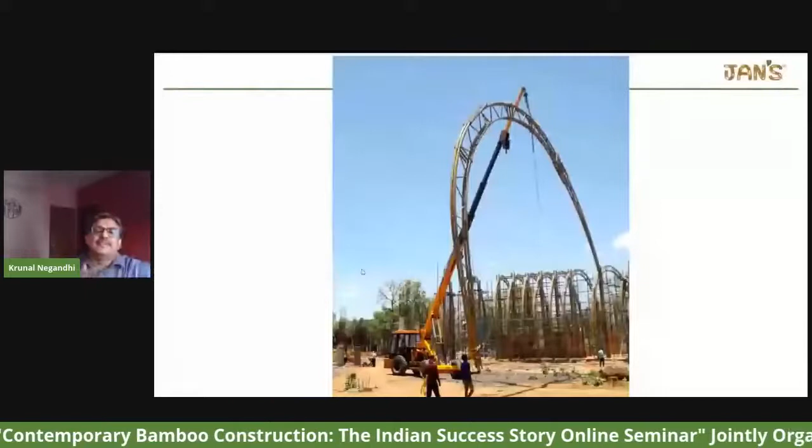Of course, there was a lot of interaction, because as we built structures we faced issues - bending, buckling, the additional stiffness that would be required, etc., which Dr. Abhay Gupta has elaborated upon, and I won't go into it in more detail. But all these things were taken care of when we started doing these structures.

I'll just share some pictures, which even Mike has shared, just to give you a sense of the size of the project. It's roughly about 1 lakh square feet of built area, which was completed. This is the hostel block.

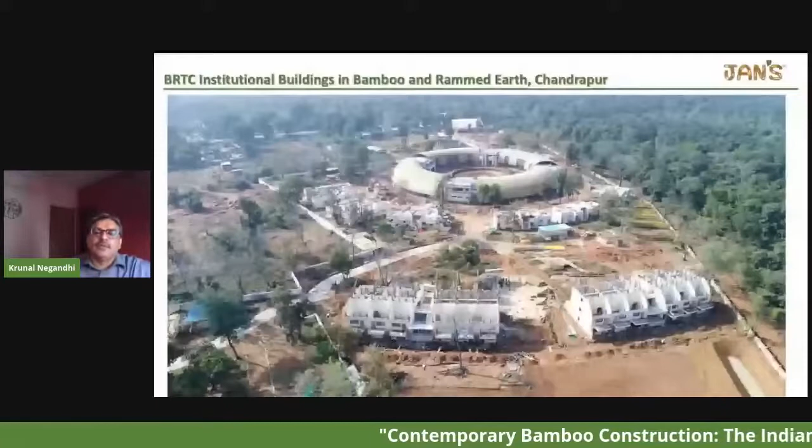In terms of basic learnings, which is what CE sir mentioned, I should definitely put that upon - bamboo is not an easy material to work with as of now. Why? Because there is a lack of knowledge about the material, lack of skilled manpower. It's not a very consistent material, and when you consider all these factors, there isn't a set ecosystem yet.

But at the same time, the benefits of using this material - where else would you get to do a structure of 1 lakh square feet and say, look, we have been able to sequester 1,500 metric tons of CO2 from the atmosphere just because we built a bamboo structure. This is not going to be possible using any other material. So there are pros and cons.

As architects, designers, clients, I think as Caesar mentioned, at least some part of it - if you may not be able to do it fully, but at least some part, if you start doing in bamboo, then the ecosystem will start getting developed. Because when a carpenter is working on bamboo joinery, he would ask, okay, but where is this experience going to take me further? This big structure has been built, but are there any other structures of similar nature going to be built for me, to get that kind of work consistently? Or will I end up coming back and doing my typical carpentry? If that happens, then this experience is not going to help me at all.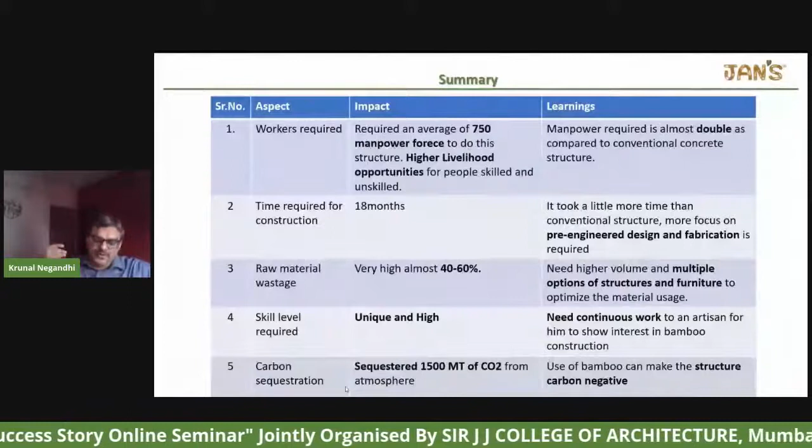When you take steel or concrete or cement, for example, at the bottom of the pyramid is a factory. Here, at the bottom of the pyramid, is a farmer. So if you see the entire supply chain, the amount of benefit it gets in terms of livelihood opportunity is tremendously higher compared to steel and concrete.

Also, when we look at concrete structures, typically 60% will be the cost of material and 40% is the cost of manpower. But in bamboo, you'll realize that probably 20% becomes the cost of material and 80% will be the cost of labor.

So what it means is that more and more livelihood opportunities are getting created, which for a country like ours is definitely a need of the hour.

For this project, we had 15 months time and 3 months were extended, so 18 months total.

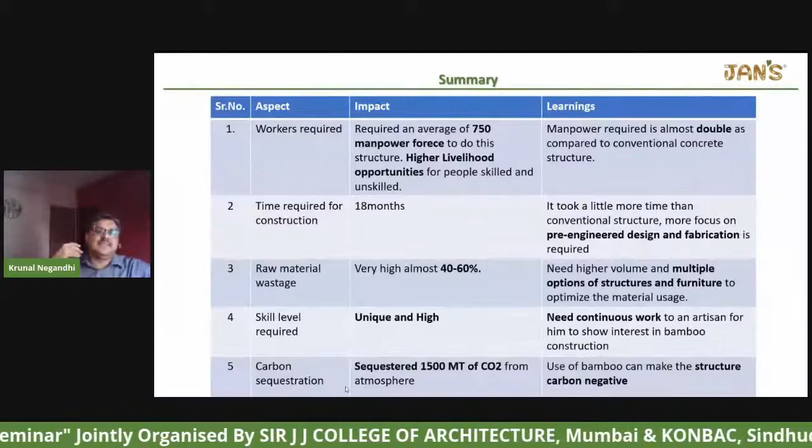I think it's a little higher than conventional material, but I also think that's because it's being done for the first time. It's just like car manufacturing. Once the assembly line is set and there is modularity in design, there is consistency of flow of material, and it becomes as fast as a steel fabricated structure.

That is definitely possible. In terms of raw material usage, this is very interesting. We tend to take a 5-10% rolling margin, but in steel it's not permitted to be more than 2.5%, if I'm not wrong.

Because of the taper that Dr. Abhay Gupta mentioned, going from 100mm to 80mm to 70mm with varying wall thickness, a pole of 6.5 meters only gives you an effective length of 4 meters. Where will the other 2.5 meters go?

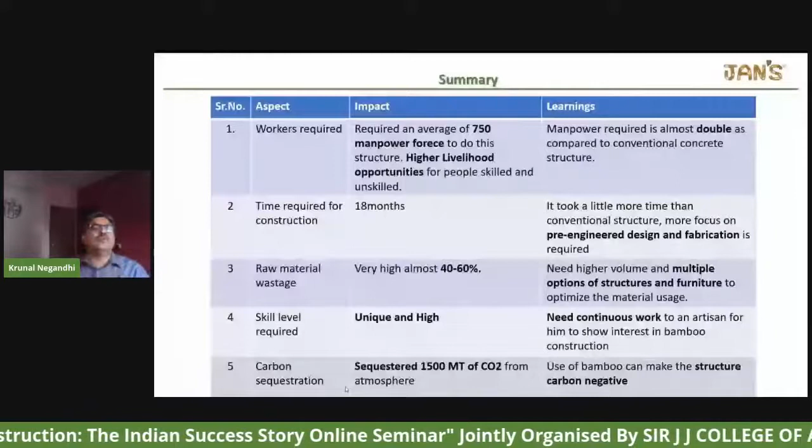So until you have multiple products, whether it's furniture or simple fencing without structural requirements, until you have a combination of multiple products, you will not be able to use raw material effectively, and it will result in extremely high wastage of 40 to 60%. That's one factor to keep in mind when looking at structures out of bamboo.

The skill level required is unique and high. Why unique? Because even a small mistake will be visible. When you do concrete, you plaster and paint it. When you do steel, you paint it too, and it's mostly bolting or welding. In woodwork, you tend to cover it with sun mica or veneer. But in bamboo, even a scratch would be visible because there's no way to cover it.

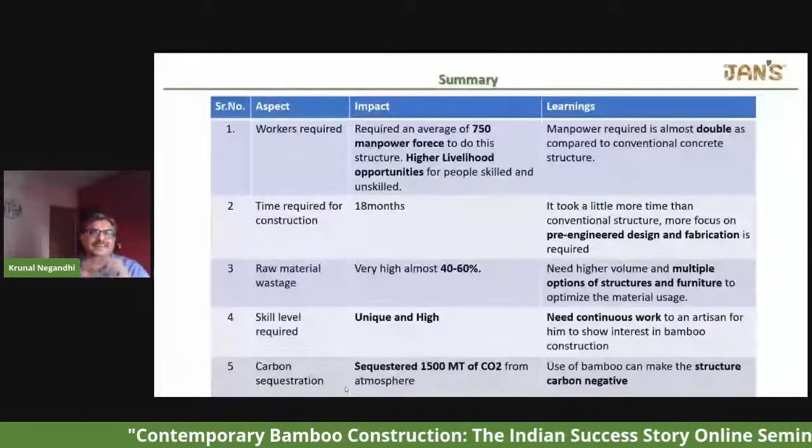So the worker who is actually doing the work needs to have passion for it. If he loves his work, he will take care while doing it, and that will show. So it's a very unique and fairly high skill set required, because the joinery is different—you join using bamboo pegs, which requires a certain level of skill.

And as I touched upon earlier, carbon sequestration is my biggest kick out of this work—being able to contribute to the environment in whatever little way we can through the learnings of construction I've had. That's my biggest kick in the entire thing.

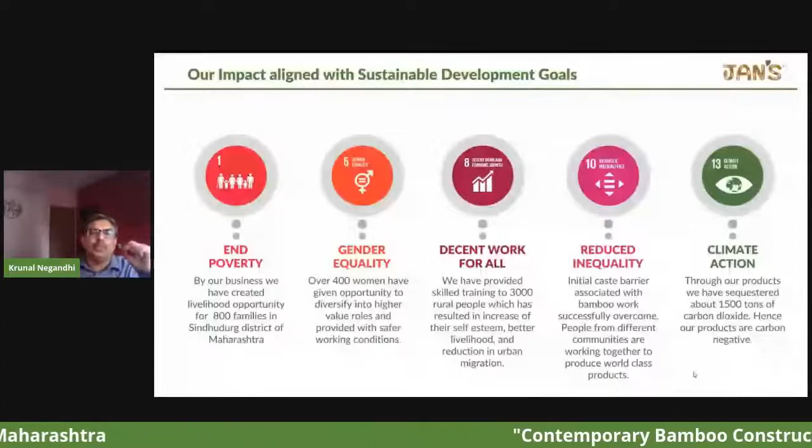If you were to compare other impacts that are possible—in terms of livelihood creation, people trained, reduced inequality, and the other SDGs that the world measures itself by—I think bamboo would be the hero material in construction.

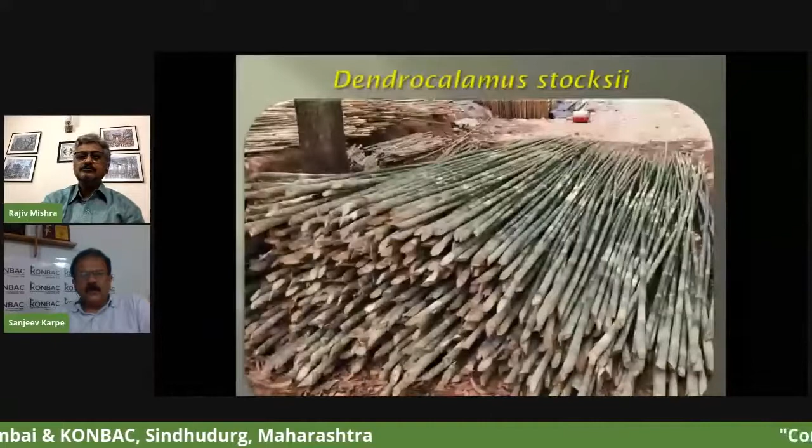We have trained our farmers to grow this Dendrocalamus stocksii species of bamboo, which typically has 40 to 50 mm diameter and not more than 3 to 4 meter of usable length.

Even though this is not one of the best available construction materials, when we refer to the IS code, we saw that if you do proper grading of structural use bamboo, the first parameter is age. It should be 3 to 4 years of age. Minimum diameter should be 45 mm.

Then minimum diameter at top should not be more or less than 35, length should be 4 meters, taper should not be more than maximum 4 per meter length, straightness of the culm should be there, and wall thickness should not be less than 10 mm. That is the requirement.

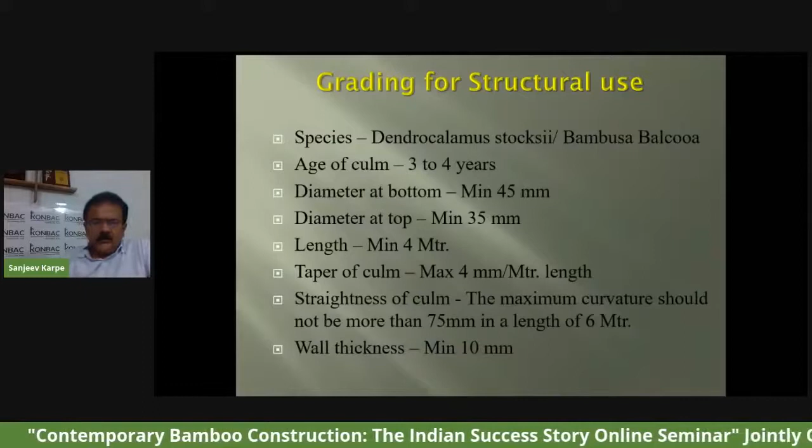Now, age grading has to be done within the first 1 week of harvesting. If you see different age material—1.5, 2, 3, 4, 5 year old bamboo of the same species—it looks different. But after 2 weeks, when bamboo is dried, you are not able to recognize the age visually. That is the main limitation of bamboo.

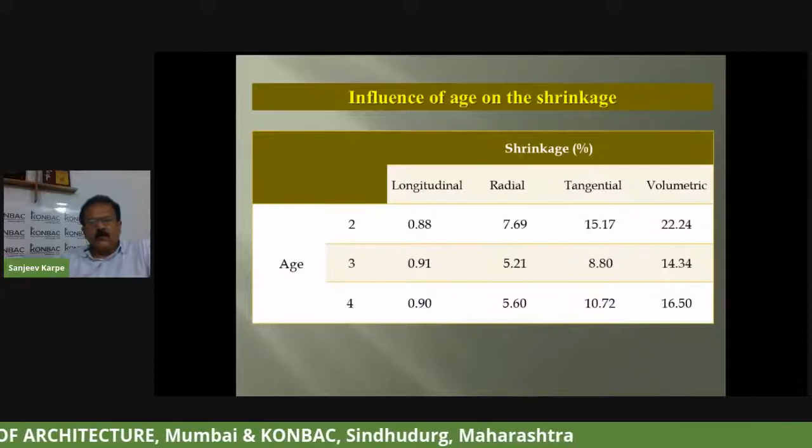If you see how age influences the density and porosity of the bamboo, for Dendrocalamus stocksii, 3-year-old bamboo is the right material. Even if you see how shrinkage happens longitudinally, radially, tangentially, and volumetrically, 3-year-old material is the best option for this species. About durability, yes, you need to treat bamboo.

We have an IS code for preservation of bamboo for structural purposes, and that code says that if you do a pressure treatment, the durability of bamboo will be 50 years.

This is the typical pressure treatment plant which we erected in our Kudal CFC in 2007.

Then you need to straighten the bamboo because bamboo poles are not always straight. This is a very, very crude method of straightening it. This needs very highly skilled manpower, but you can absolutely straighten bamboo like a pipe.

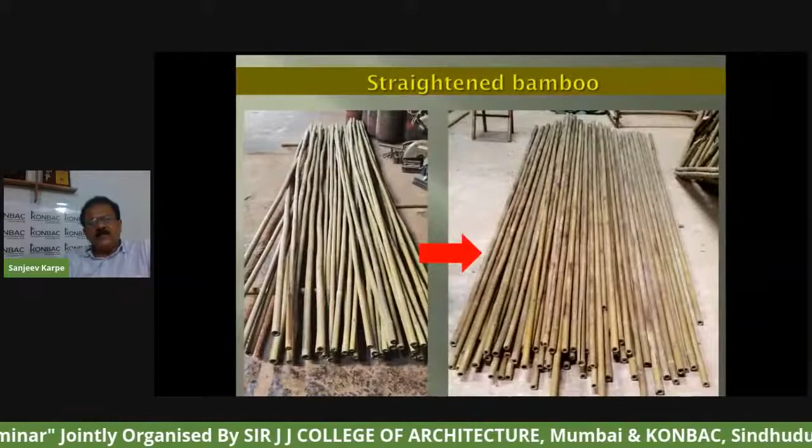In a similar manner, you can bend bamboo. There are various methods to bend bamboo, and you can really achieve a nice, aesthetic-looking bend.

Once you have treated and graded bamboo, then you need to know how much load it can take. So load testing is a must because bamboo is a bioresource.

And after doing all these things, we started constructing bamboo cottages, typically with maybe a 6 meter span.

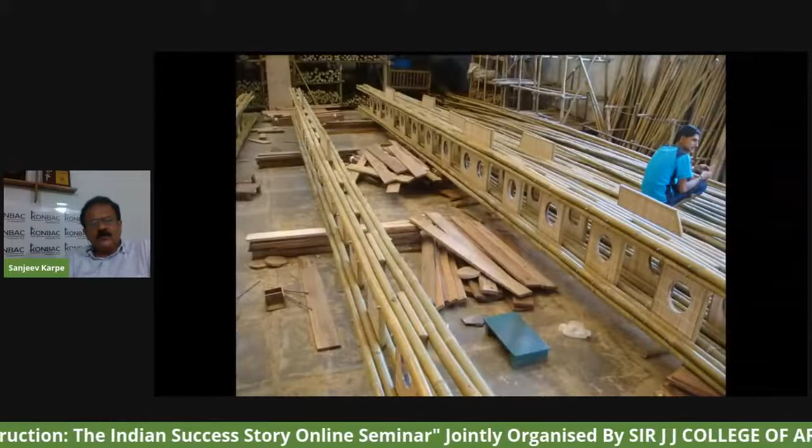And then we thought of doing a larger building with this smaller diameter bamboo of 40 to 50 mm dia. Initially everybody thought that this is not the right material to do larger structures, but we said that because we have this bamboo locally available, we need to do it. When we did load testing, we found that it works.

These are the component packs transported through trailers on site, and then we tried for the bigger span building. When the BRTC project came, everybody said that now, because this is a very big project, we need to have material comparable to international standards.

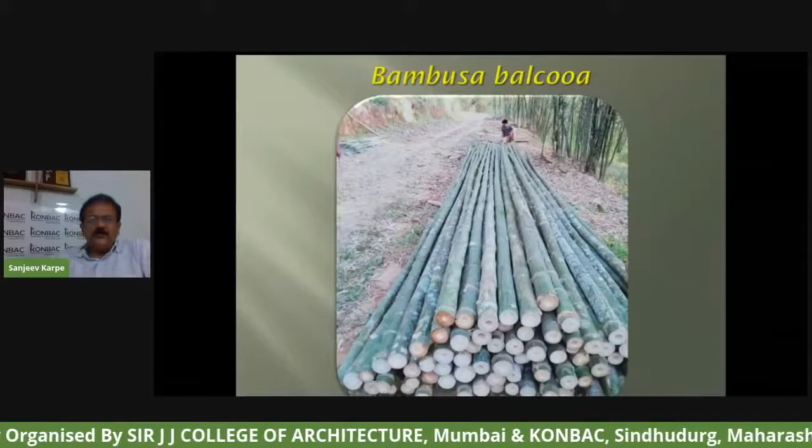So Bambusa balcooa is one of the best species in India, which has been promoted in Maharashtra for plantation, and a lot of planting has already happened. So everybody thought that now it's time we should start using this material.

So we selected this. This has a 70 to 100 mm diameter, having 5 to 6 meters of usable length, and you can get 2 or 3 pieces from one pole also. So this is the bamboo.

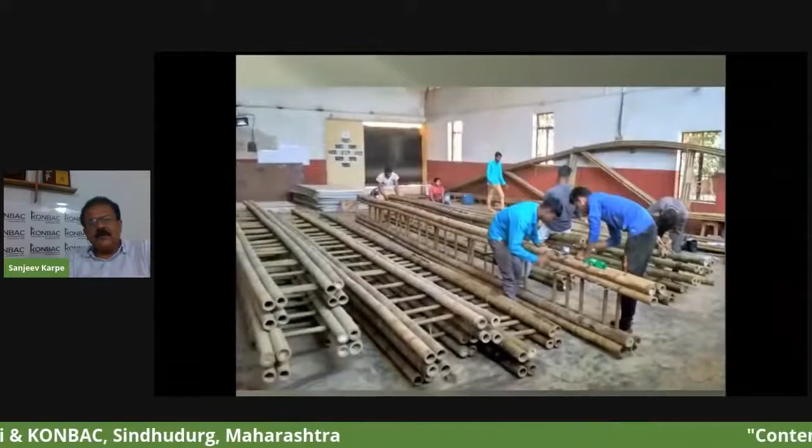Initially we procured it from West Bengal and treated it in our plant, and then started making the components, and got confidence that yes, this can be bent also, with a fair amount of uniformity. We started prefabricating this in our factory at Kudal, and this prefabricated material has been used for BRTC.

So yes, now in India we have material which is comparable to international standards also, and can be used for construction. KONBAC is doing training for architects.

Basically, new architecture students need to be trained. So we have hands-on training workshops in Kudal, and young minds are being trained. And I'm very sure that in the near future, we will have thousands of young architects working with this material.

Thank you very much, sir. I will not take more of the time right now because we are already late. Thank you, Rajuji.

Thank you, Karpe sir. Out of the several questions that have come, some very interesting ones relate to structural engineering about vertical connectivity between bamboo. An architect named Makaran asked when bamboo will become acceptable as a DSR material in PWD structures so that billing could be done. There was also a specific question to Ramarao sir: can we build a bridge in bamboo as a pilot study? I think Ramarao sir, you can highlight the bamboo bridge question.